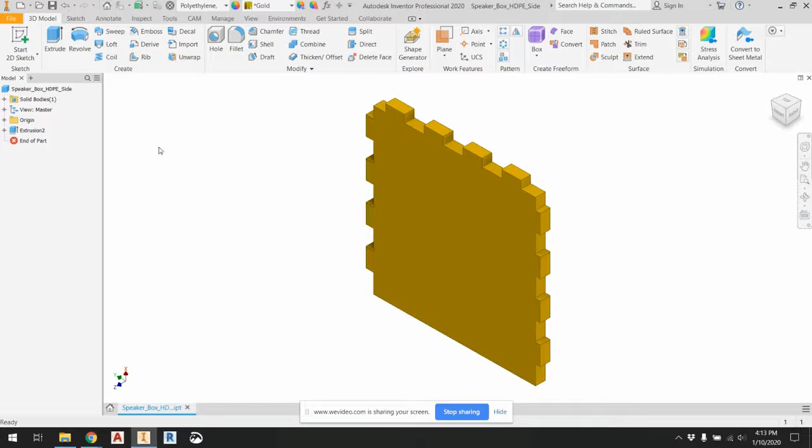Assuming you did all of your sketch work or design work for the tile in one sketch, expand the extrusion, right-click on the sketch, and export sketch as. Export it as a DXF. It should be in the same folder.

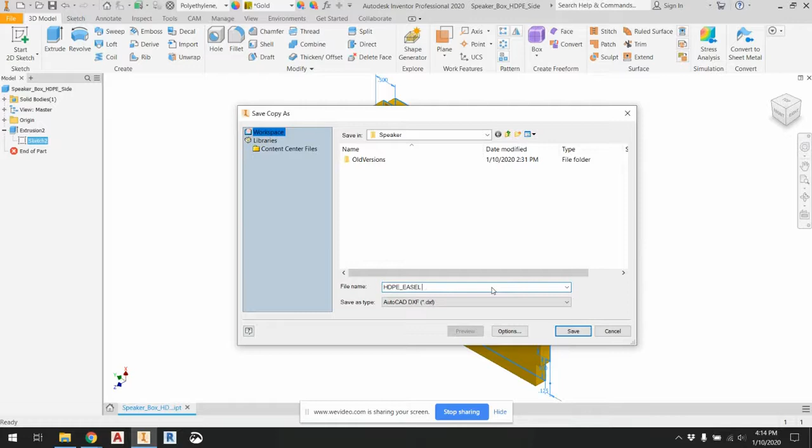I'll just call it HDPE Easel file. Save that. All right, so now you can go to Easel.

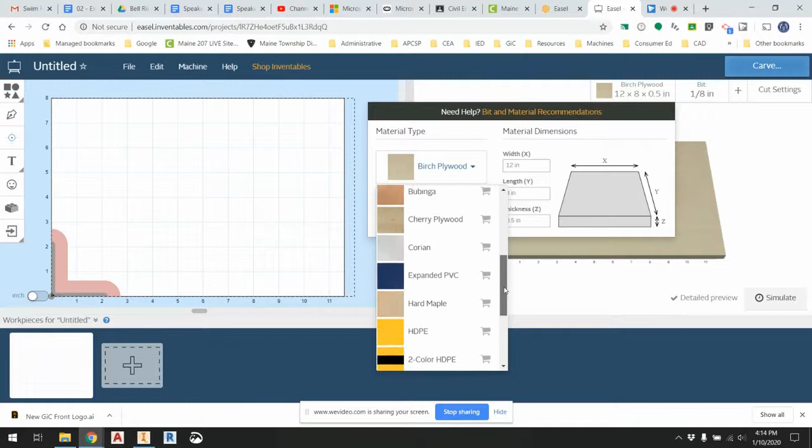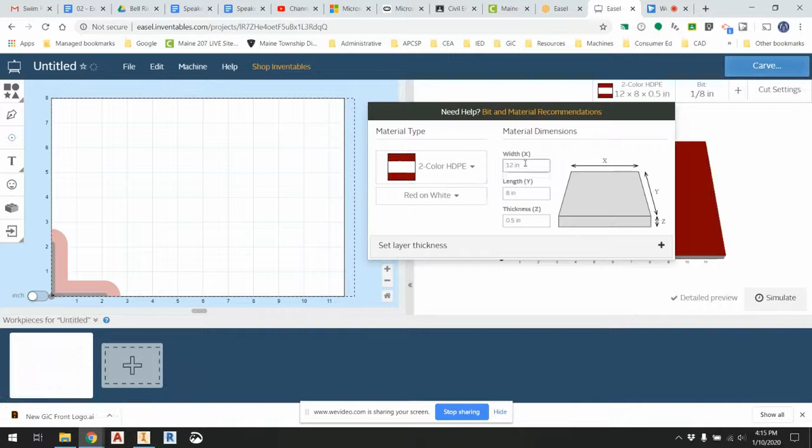Before we get started, let's make sure we have the settings correct. Instead of birch ply, which is the standard, we're going to use the 2-color HDPE. You can change it to the colors you want—if you have blue and white, we have a lot of different colors. Go back to the cabinet and choose the ones you want. I'll choose red for this one, since I've been using a lot of blue. The width is 6 inches by 6 inches, and it's 1/4 inch thick, 0.25 inches. We're going to use an 1/8 inch bit here, so that's fine.

And the machine we're going to use is the Carvey. All right, so now we have everything set up the way we want. Let me reduce this down, drag it over, and zoom in a little bit.

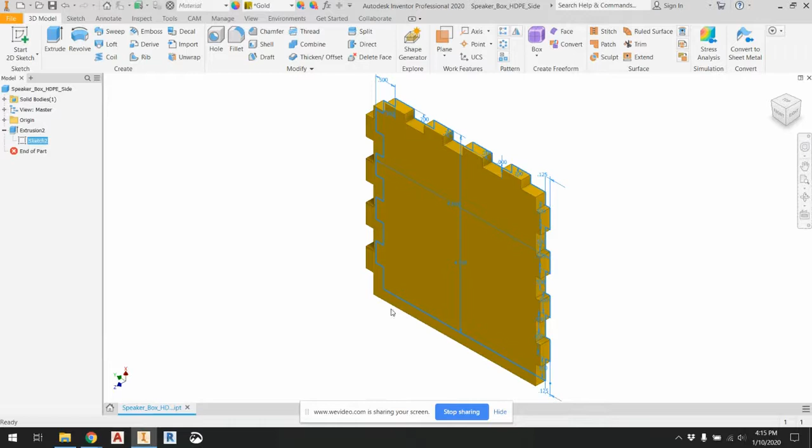The other thing we need to be careful about is that we want to put the design, the engraving, on the outside of the box. So when we look at the front, this is the front face. We want to make sure our engraving goes on the back face, so this is the way we want it oriented when we do our carving. We might need to rotate and reflect things once we get into Easel. We'll see how it all works out.

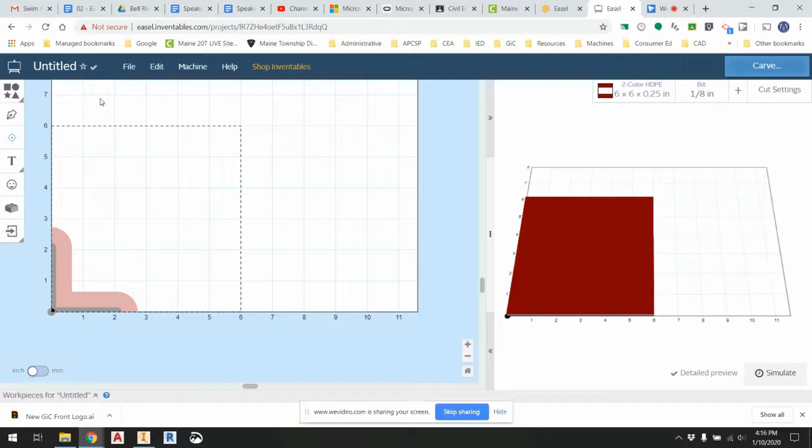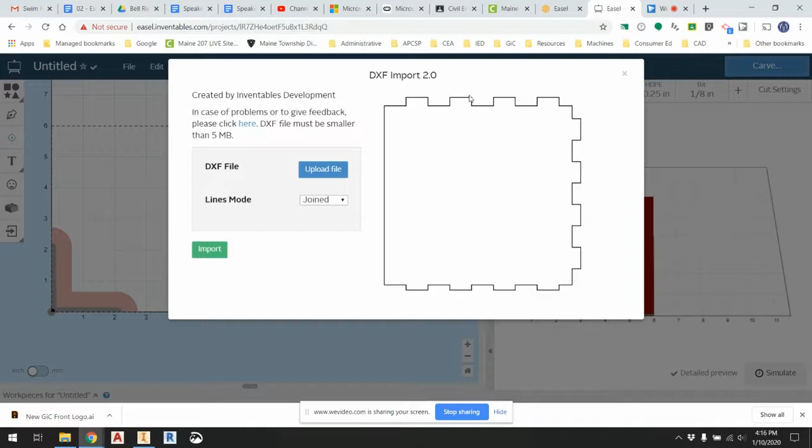So we do a DXF import. I go and find the file—I have mine on my U drive. It should be in this folder, HDPE Easel file. Upload... let's see, looks pretty good, looks like it might work. So if I say import—there we go. And it all went in as one file right there.

So it is turned—I'd rather have the side that's facing up, face up. Here looks like my thicker side. When I rotate it, it is backwards. So if I look at that, this is the back side of it. I want the thicker, longer fingers on the left side, so I need to figure out a way to reflect this.

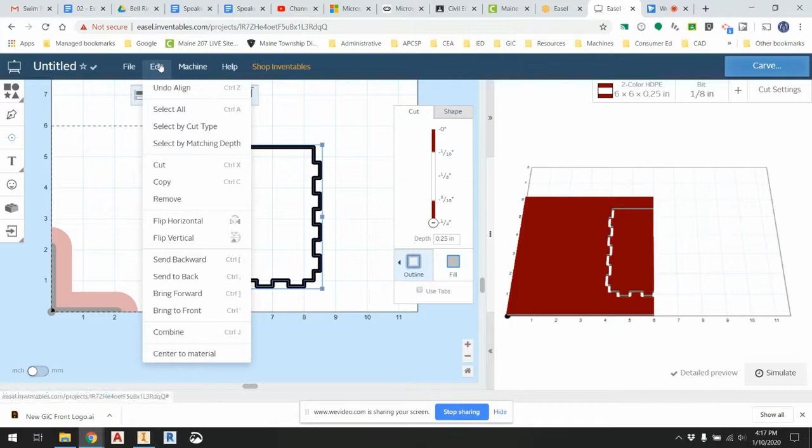So what I need to do here—let's see if I'm able to do this. Nope, undo that. Let's see, how can I mirror this? Edit, flip horizontal. There we go. Pretty quick and easy, a horizontal flip.

All right, so let's check the shape. Okay, it's still 4.5 by 4.5. Excellent.

All right, so the other thing about the outside, before I start doing any design on the inside—the way this is being carved, if I zoom in here, you see the lines here, the center of the tool is going to follow this line. So it's carving on the tool path. What I want is to actually carve the outside edge here, so it's actually 4.5 inches by 4.5 inches and everything like that. So when I go to the cut, I want to change it from on-path to the outside edge.

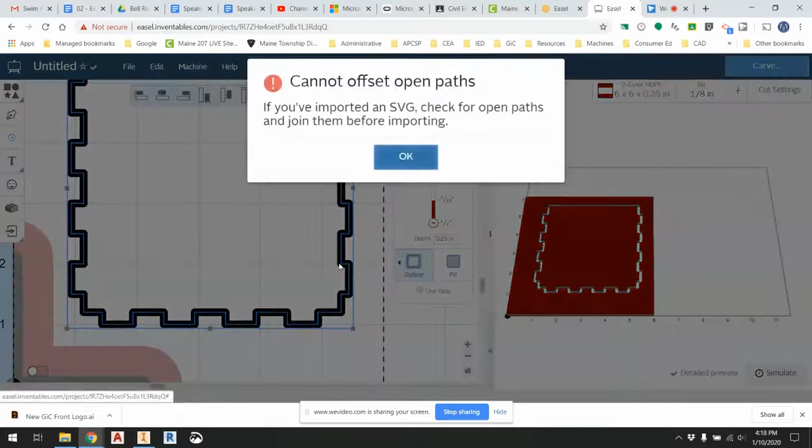All right, let's see. First of all, I need to use tabs—4 of them. Something's not quite going right here, I've got to maybe zoom out a little bit. Let's move my tabs around so they're not all on top of each other.

Okay, they're a bit long at the moment. First off, I'm going to reduce them to 1/10 of an inch in length and move them to places like this. Excellent. Okay, let's try this again. Last time I was able to do this, I want to change it to an outside.

If you've imported an SVG, check for open paths and join them before importing. So it's saying there's an open path somewhere. Oh, looks like I copied it. That's why. So I was working off a copy by accident, and that's probably why I was getting an error message, because I was trying to do 2 at the same time, which it's not going to like.

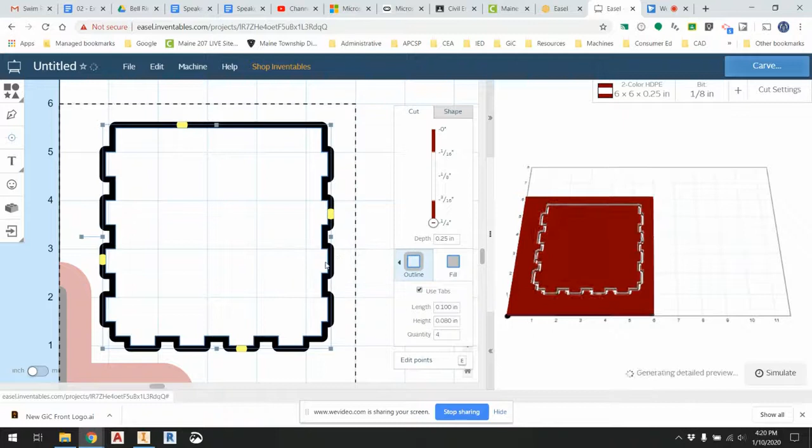So let's try this again. All right, there we go. And then outside. Okay, there we go. Finally, that worked. So if you run into an error like mine, maybe you made 2 copies or something. So either way, now we're good to go.

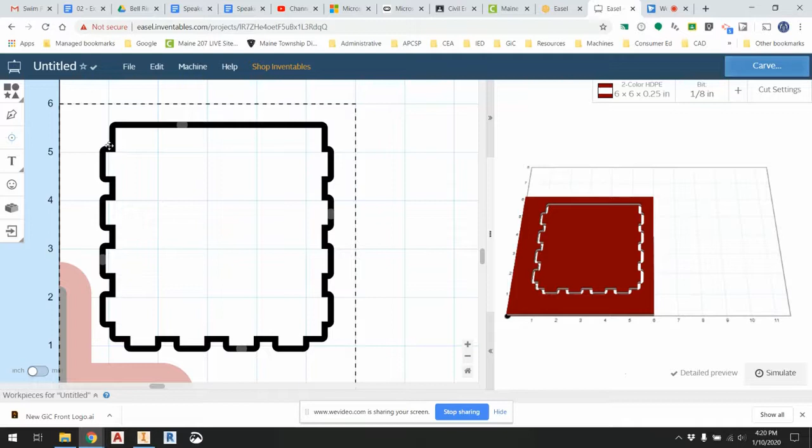There's one more issue though, these corners here, when we actually drill into here, you're not going to see, like, when the tool bit spins, it's a round tool bit and it'll make a round hole. So these square edges here will not fit quite right with the other pieces trying to be fit into it if you don't kind of over drill here, because it's going to be rounded. It's not going to fit in nice and flush.

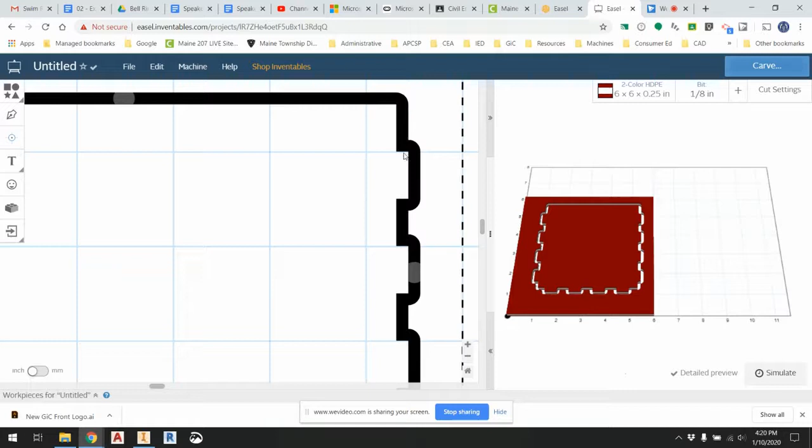So you need to actually drill out a little extra material here. The way we do that is just do a drill point, and it's what's called putting in a dog bone shape, because in the end it looks kind of like a dog bone. So you put one here, and you just put these drill holes at all of these inside corners. Almost missed one there, and I almost missed one up here.

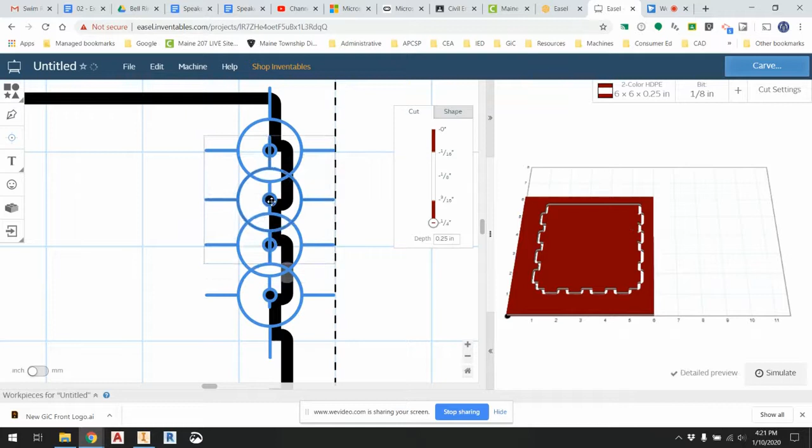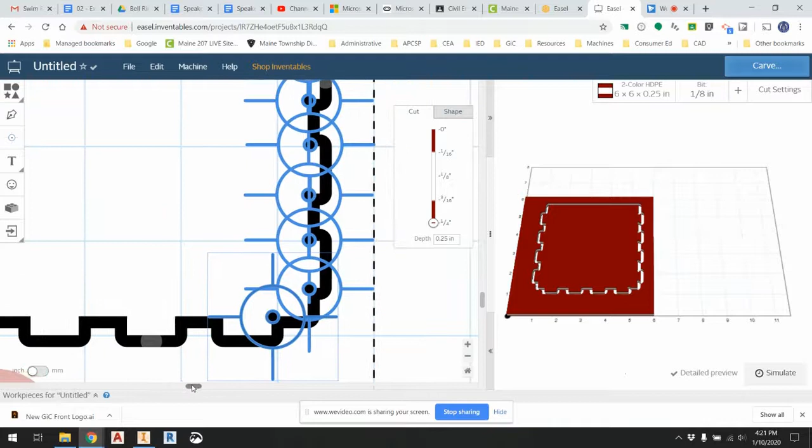So every inside corner, you're going to need to put in a drill hole. All right, that just drills straight through the material and over drills a little bit, so it allows the other finger joint to fit in nice and flush without any issues. So it takes a little while to do that. I'm not going to go through all of it on camera right now, it's a waste of time, but you get the idea. It's just every single one of those, all of these little edges here are going to need it.

All right, so now what you need to do, I can zoom out a little bit. Now you can start working on your artistic design. Here, if you want to import something you found online, so like for example, if I look up Maine East M, like if I'm looking for that image or something like that, let's see, do I find Maine East logo maybe?

Well, we can see if we could try to do the demon face. I'm not sure how that's going to really turn out. Here we go, that's the M that I'm looking for, actually. So if I save this image, it's going to save as PNG, which should work. So save that, then I can go back to

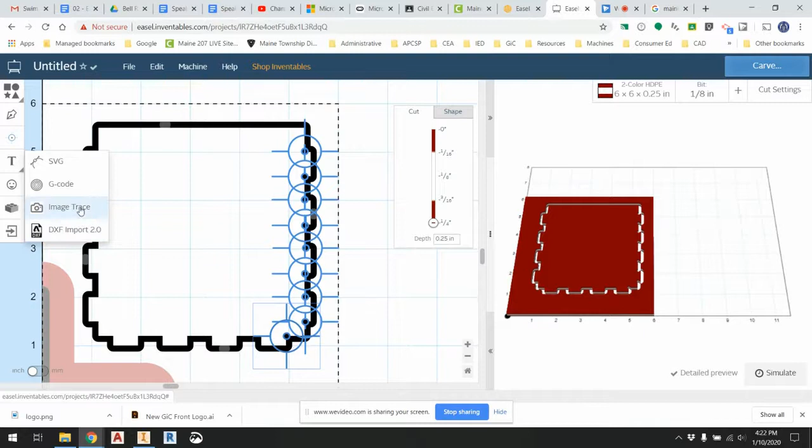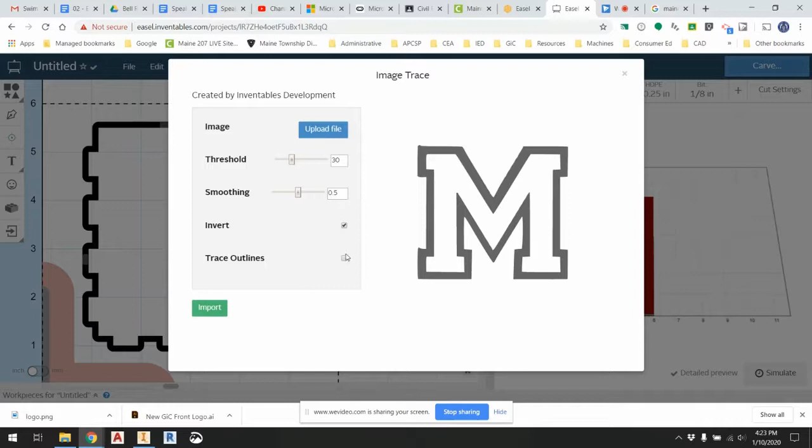Easel and do import, image trace, upload a file, the logo, upload. We'll see how this turns out. Pretty good. If I want to invert it, there. So I just want to do the outside of the M. All right, if I even try to play with like trace outline, we'll see if that could work. All right, let's go ahead and import that.

That's kind of cool. And then if I really wanted to do Maine's colors, I could change this back to like blue and white. So that looks a little more realistic.

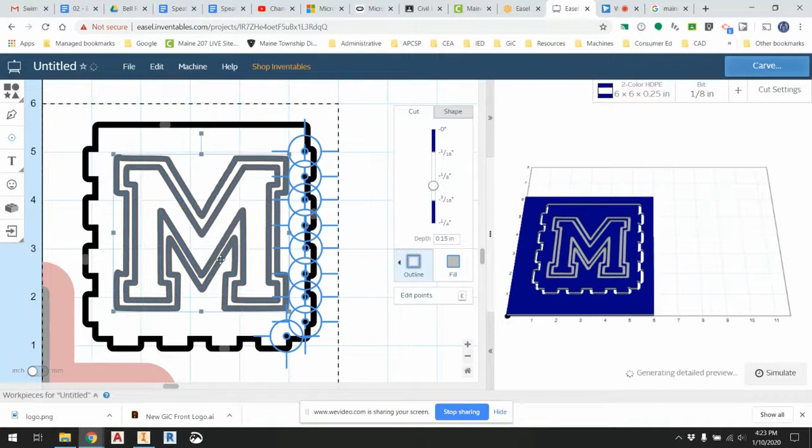And there you go. What I want to show you, the issue is if I make this too small, it might show up here, but it's not really gonna do some kind of fill. See over here, it's actually not gonna drill anymore the appropriate way. So I need to make sure that my design is such a way that it shows up, because this is a pretty accurate representation of what it's going to really look like.

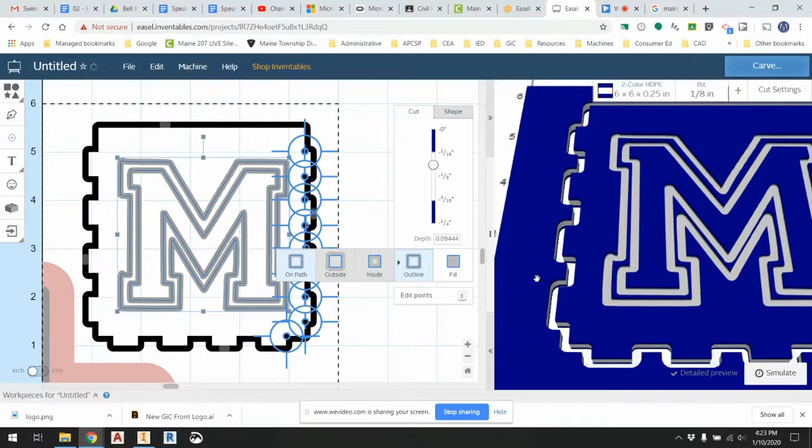I can actually make it a little shallower, that way it'll drill faster. Again, you don't want to make this one too overly complex, so it's just not going to drill right. It's going to be a lot of cleanup.

So that's it. Once this is done, which it seems to be, make sure you share it with your teacher, and then you can go to the computer connected to the carver and go ahead and get it carved. Any questions, please ask your teacher.